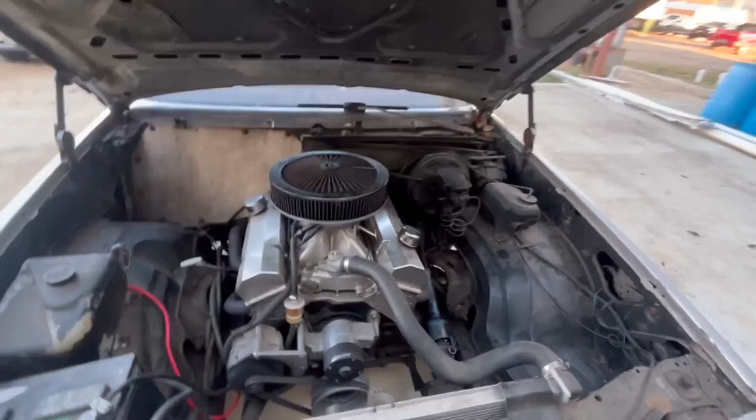All right, boys, got the old Malibu home. Went by and checked out the CNC machine, which I am going to buy. I just got to figure out how to get it to my shop now. So I'm going to give this thing a wash down.

I'll say that the paint — really the only thing that makes me say that is this big scratch right here — is a little worse for wear than I thought. But overall, the motor, the trans, the rear end, everything in this thing's actually really fresh, and it's just been sitting outside for a long time. The headlights, taillights work, windshield wipers work, everything works. It's just the interior is pretty tore up, so it needs door bushings, some drag rugs over the seat, all cleaned up. I've got a new bezel coming from Noah Stein, and it needs a couple of the panels put back in, but all in all, this thing's super solid. Normally this is all rusted out right here, and this car is actually really solid. It has one rear frame rail, which G-bodies are completely known for, that's rusted, but other than that, the rest of the frame's super solid.

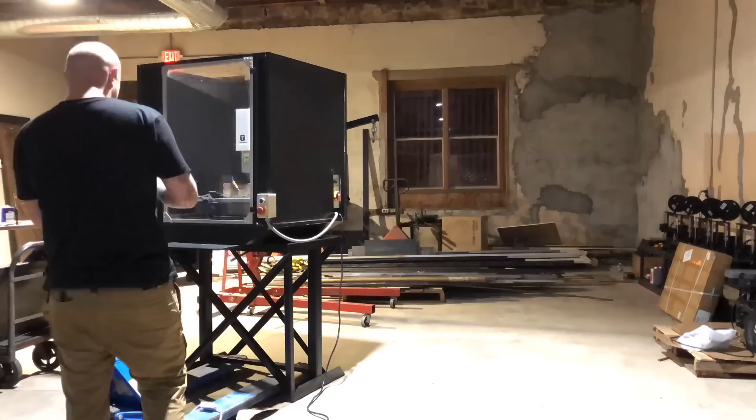Okay, it's been a few days since I did an update video, but since then, if you remember, I went and picked up the Malibu.

I'll show you here, I got the Malibu cleaned up. Already got it raffled off. I literally posted it the day after I got it, and the raffle filled up that night, like instantly.

I gave the people the option to get the car or $8,000. The guy that won it, Cody Keller from New York, chose the money, so I now have a Malibu.

I'm not sure what I'm gonna do with it. I really don't need it. I really want it, but I don't need it. Not sure what I'm gonna do with it, but that's besides the point.

Malibu's done for. I'm either gonna keep it and make content or sell it off. I would raffle it again, but I just don't want to saturate, I don't want to annoy people with me raffling something every other day. But like I said, besides the point, Malibu's done.

I did not get the Haas, and I'll tell you why. I did some measuring when I got home, and I was figuring I might have to take the metal out, and some metal off the side, and maybe even cut a purlin to get the Haas inside the small building.

And I thought I'd be able to get it through that opening here, but I could not. So then I thought I'd be able to take all this out and get it through there, and I cannot.

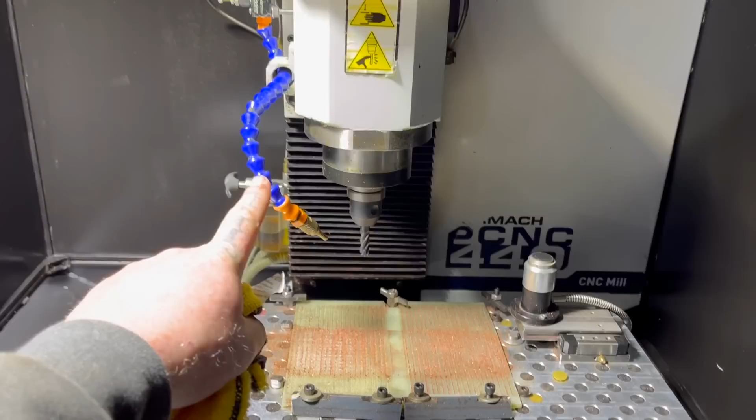It's already got the air mister set up on it and the automatic tool setter, which is super nice. And it's got the touch probe, which is awesome.

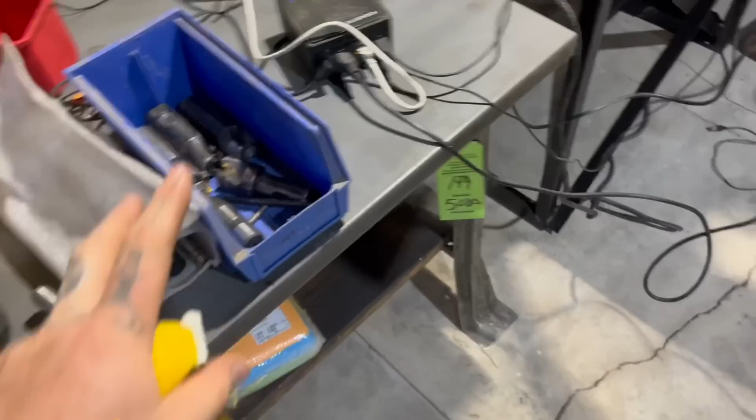Came with, like I said, a bunch of tooling, and a lot of these end mills that I already have from the auction are going to fit in here really nice.

So I have no idea what I'm doing. I'm going to Google now. First, I'm going to try to fit the biggest end mill in here I can. This is only, I think, a 3/8, but I have a 1/2 inch end mill.

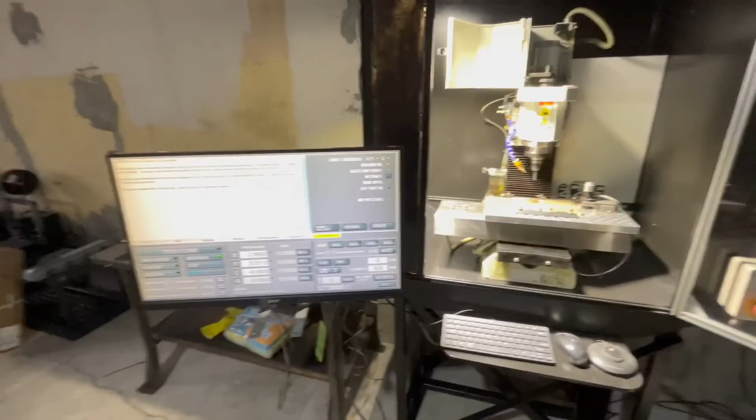I'm going to try to put in one of the collets, and then I'm going to take this fixturing off and put the vise on here, and then put a piece of metal in here and just try to face a piece of metal first, which I don't even have to do in Fusion or anything.

This has, I forget what they call it, conversational software, which says that right there.

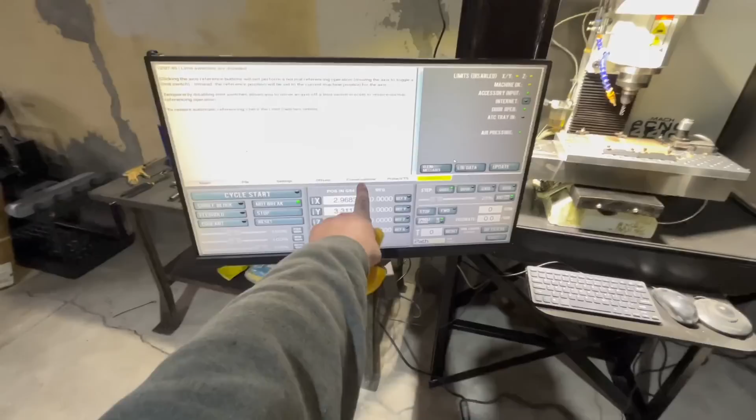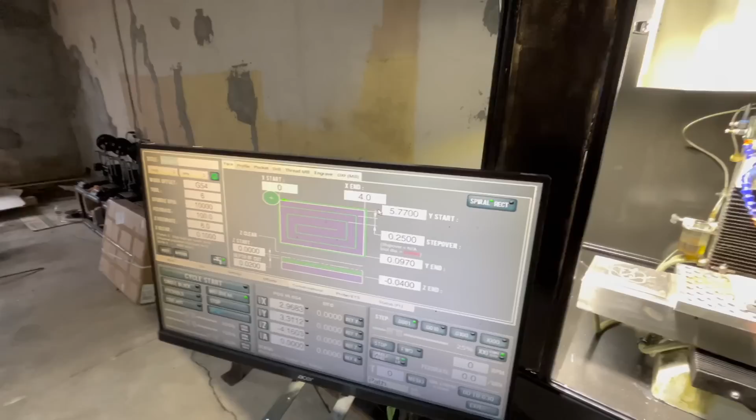But you can go here, and I believe, like I said, this is my first time messing with it, but I can put in how big my piece is, what I want to do with it, where it's at, all that, and then it'll do it once I hit go.

I don't have to set up everything on Fusion or whatever. If I'm just trying to put a flat piece in there, drill some holes and face it, I can do that right here. I don't have to draw up a whole CAD model, all that. So it'll basically create its own G code or whatever it uses to face that.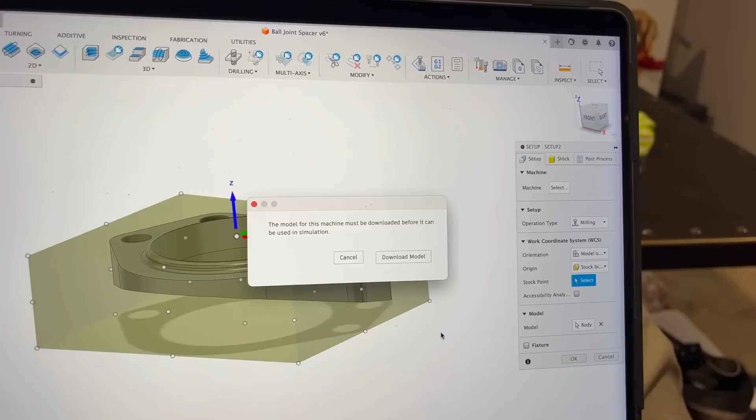I had to go to Dennis's and steal some Wi-Fi, but I got it to where now my machine is downloaded and I've got the stock size, which is my piece of aluminum that I'm gonna have put in here, and you're just gonna have to see how cool this is. So as soon as I hit okay...

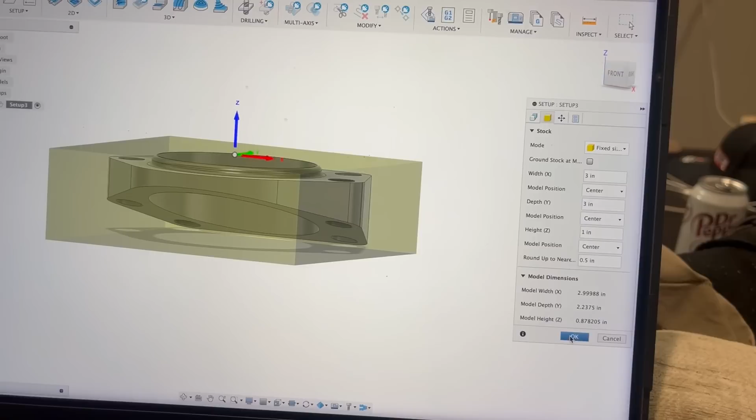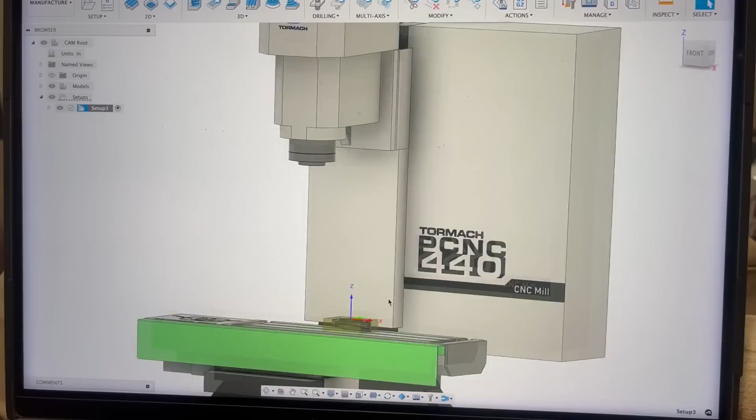That's my machine in Fusion 360. How awesome is that? That is literally the coolest thing I've ever seen. They have a CAD file of this machine, and that is my part on the machine bed. That is just the craziest thing I've ever seen. Obviously I have a vise and all that stuff, so I'm not sure what to do about the Z and all that, so that's to be determined, but that is awesome.

All right, as of now, I believe I have everything for the top side where it needs to be. And it's only taken me like 5 hours, and I've redone it 500 times, but I can literally do this in my sleep now. I've learned so much in those hours - I literally knew nothing before, and it's just repetition, getting it imprinted into my brain cells. And I think I pretty much got it.

So here's what I got, and I'm actually getting ready to try it after I have to go input all these tools into the machine, which I'm sure is going to take me at least an hour or so. I took a nice gouge out of my finger earlier. That was fun. But so here's what I got.

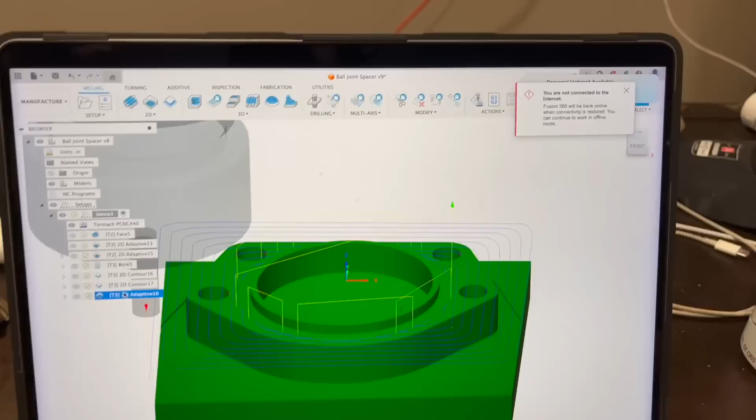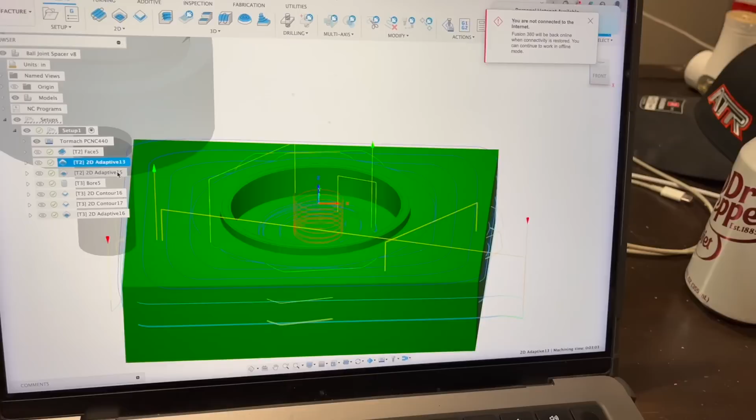This is what the finished piece is going to look like up top. But the first pass is going to be a facing. This is the top of the ball joint spacer here, right here. And this is basically going to make the piece flat. And then we're going to machine down and inside with this bad boy right here. And then we're going to machine down the outside with the big bad boy right there.

And then we're going to switch to the 1/4 inch end mill and bore those holes. And then we're gonna finish the outside with the smaller end mill, finish the inside with the smaller end mill, finish the top with the smaller end mill. And that's that.

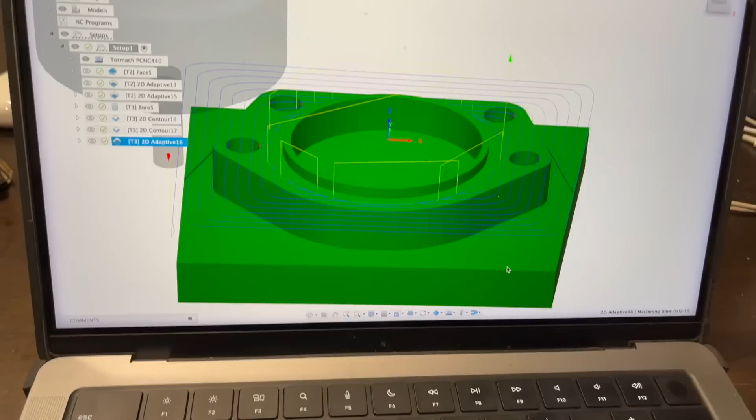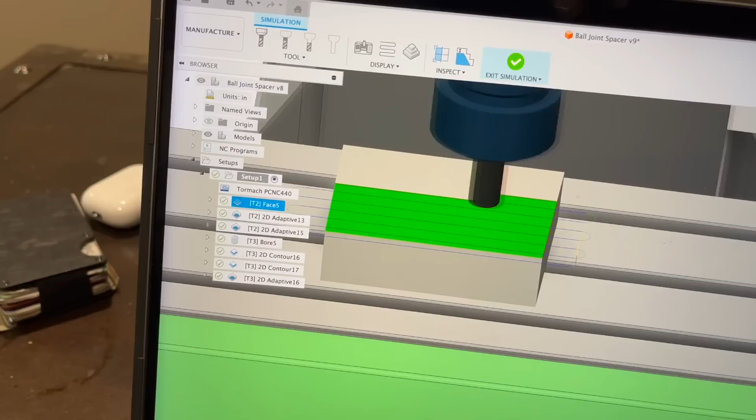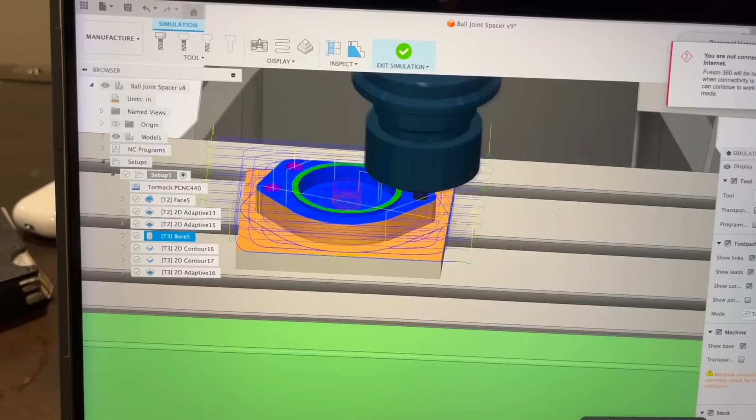You can actually see the whole deal go down right here. It's gonna face it. Let me see if I can drag it and make it faster. It's gonna face it, and then face it again, and then we're gonna go to the outside, the inside, do that bad boy, and then we're gonna change tools, drill the holes, finish the outsides and the top, and we will have half of a machined ball joint spacer.

This took me - I've talked to people that can tell me things, obviously Alex and Dennis and Brad from Tin Soldiers, they all teach me things, but it's hard to grasp the concept and make something stick when you don't really understand what they're saying. They can tell you stuff, but now I'll actually understand it. So I'm really excited to get this started.

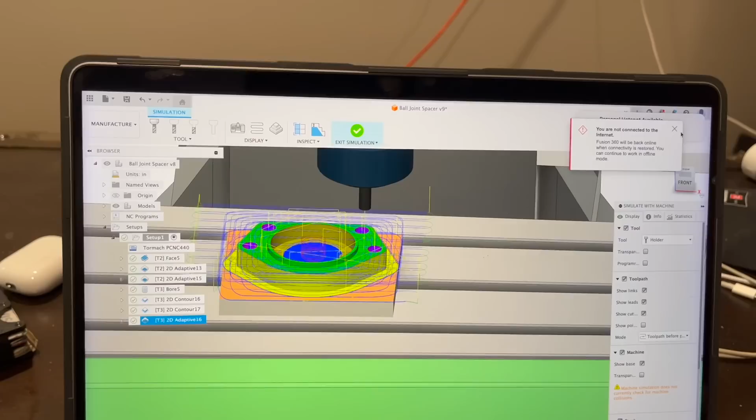Literally all you had to do was, I went up here and get off, exit this, but you hit this little G2, G1 thing right there. It posts the process, saves it to the folder, saved it, went to my folder, dragged and dropped it on my SD card, put my SD card in this little - I got my little SD card and a little adapter there, you just put it in there.

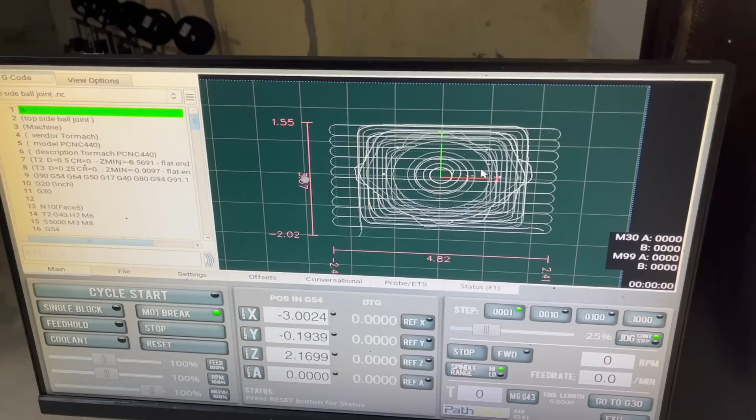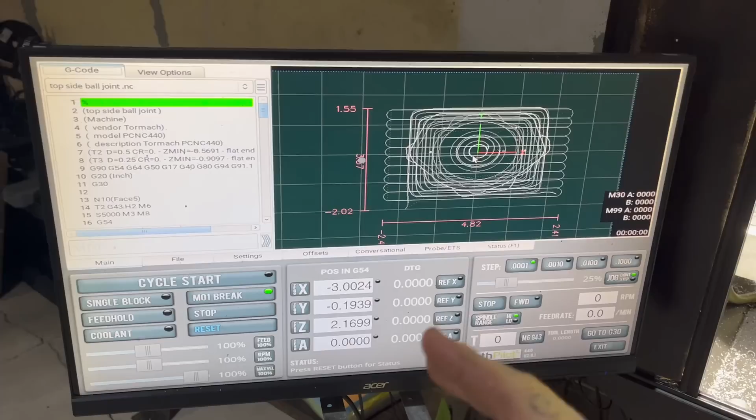I brought it over here. I went to this file thing. I clicked there, and then I hit copy, and then I hit load G code, and then it took me here. And that's all the tool paths. It's gonna face it, and then spin around, and do a whoop-de-doo, and do a bunch of cutting. So now I'm gonna set the tools up, zero reference all this stuff that has to be done, and try to remember what I'm doing there. And then we're gonna try to cut. Come on.

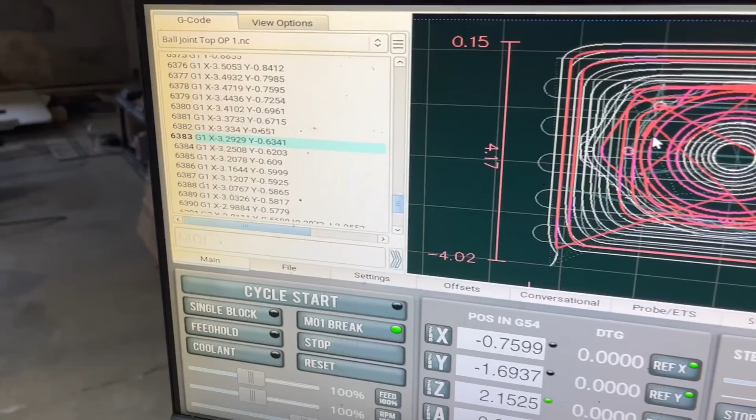After the past few days, I've stood at that machine for about 11 hours, and I've learned a lot. I've come up with one brilliant looking piece, but this piece took me an hour to make. So I am cutting down my stock.

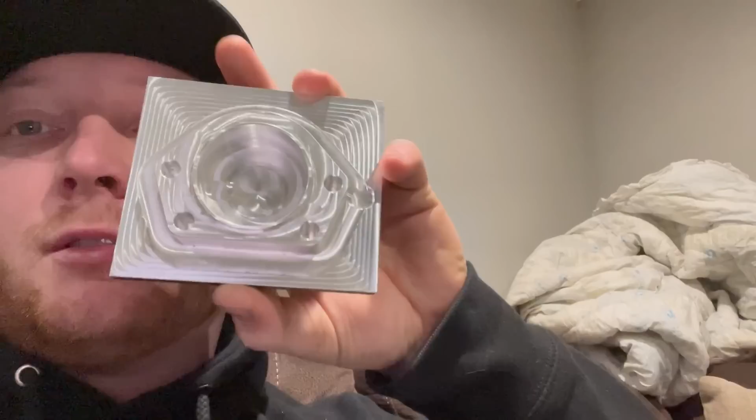I'm taking the width and length of the piece and making it smaller so there's less to machine. I'm also going to change around some of the machining parameters to try to machine faster. I've been finding the limits of the machine with bit size, feed rate, feeds and speeds.

Everybody always preaches feeds and speeds are everything, and wouldn't you know it, they're right. So let me show you what I've got here on my laptop, the tool paths, all that.

Basically I was just trying to cut a little piece out of way too big of a piece, and that takes way too long, and it's harder on your tools and your machine, and it just sucks. So I'm going to take it down because to get that finish, I've tried a couple different bits.

I'm trying to figure out how to make it as nice as possible, as quick as possible. I'm changing some things up, trying to get this down to where I can have this machine running and then go work in the shop. That way it's making parts while I'm working, so I could double dip.

I don't even know where to even start to tell you guys how much I've learned in the past 3 days. My brain's fried, I guess, but that's not it - it feels stronger. I've learned so much that I understand so much more now.

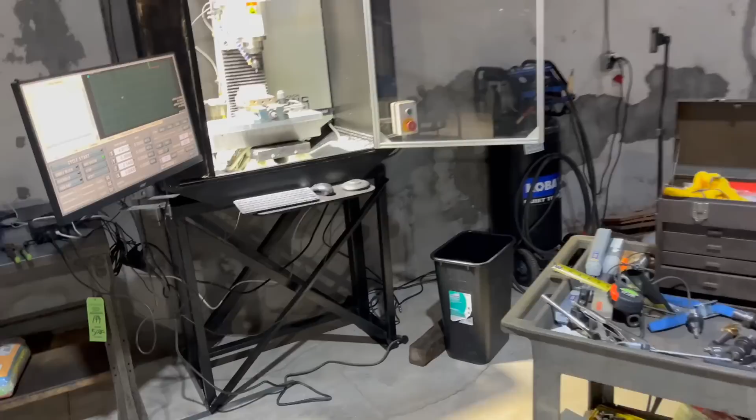Alex came over the other night and helped me because I started to cut my first part and just had everything all wrong. But look at all these chips - that's how much I've been cutting.

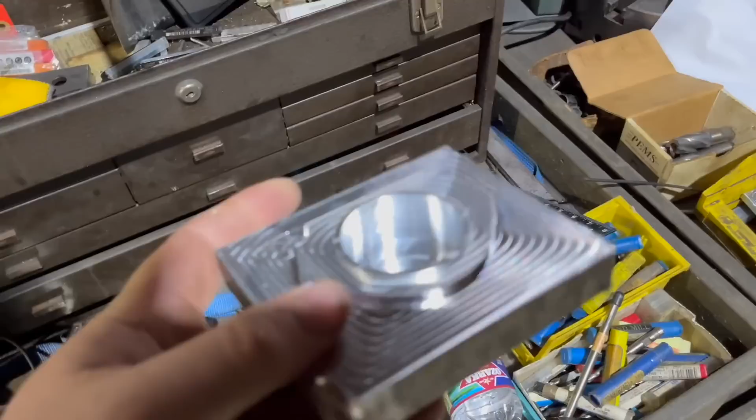That piece you see in there - here's one that I screwed up right there, see that? That's a screw up. Here's the one that I thought was gonna be my first finished piece, but I hit reset and it went right through the middle of it, so screwed that one up.

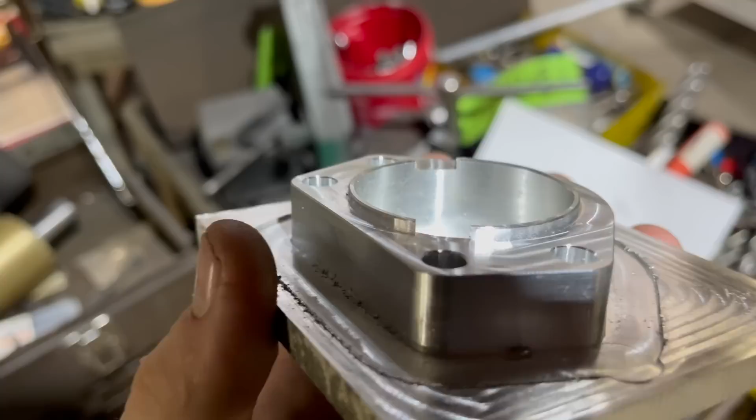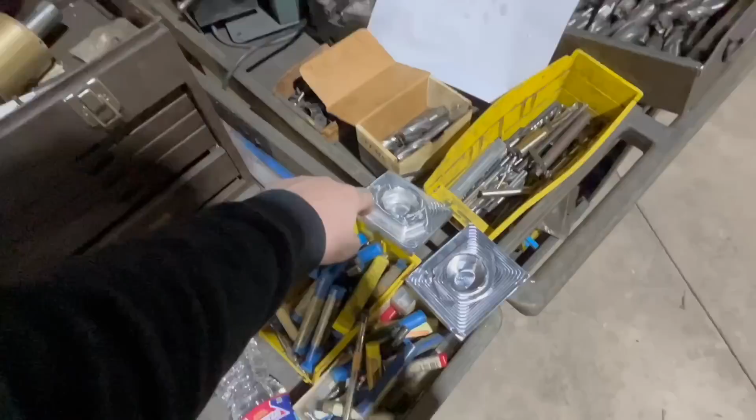The very first one we tried to do is over there in the saw. I used too long of a bit, and when it was trying to do these outside edges, it chattered really bad and they look like crap. So, 1, 2, 3, 4 pieces basically.

It's taken me 4 pieces and I think 3-4 days to get where I'm at now. But like I said, I've learned a lot, and I think I've got it somewhat close to having a program that I can run without watching it the whole time.

Will I say having a good program or the best program? No, but it's all made by me. This part was cut 100% in my shop, by me, with a file - a part that I designed and a tool path that I made. And it's just very satisfying to me.

So I hope you guys enjoyed this video. There'll be plenty more to come, but for now I have a shop that is just freaking obliterated, packed with tools and parts and stuff that needs organized, and a shop full of cars over there that needs worked on. So I'm gonna get back to work so I can try to get this thing going and have it working while I'm working, and I'll keep making videos.